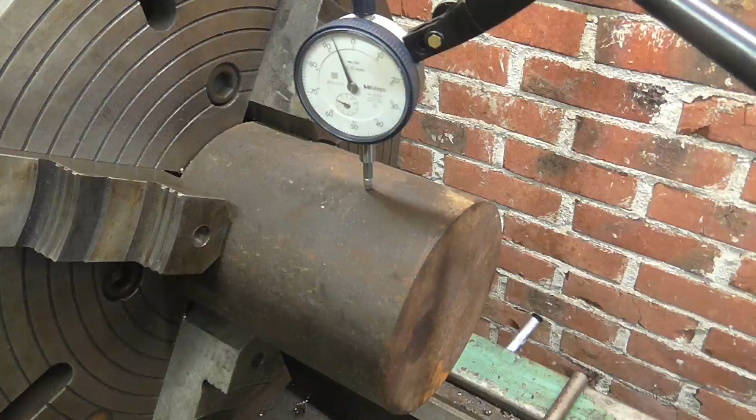Okay, with this part you're gonna see some heavier turning. This will be the part that connects the pipe to the shaft in the upside of the pole, or whatever it's called. Again, this is a piece of mystery steel.

I have no idea what the grade is. The diameter is 120 millimeters. I'm trying to dial it in. Let's see if we get any luck.

Getting close on this side. A little over 3, maybe a little over 3. And this side is, oh, there's a really big dent in here. So this is a little over 3. This is a little under 3, so tighten the other side just a bit. Oh, it's almost loose still.

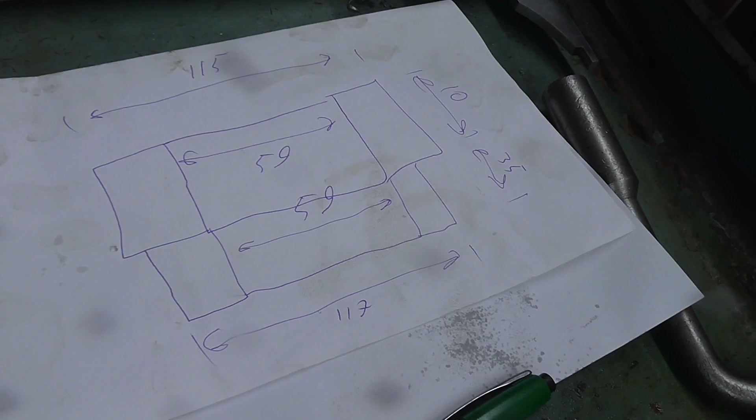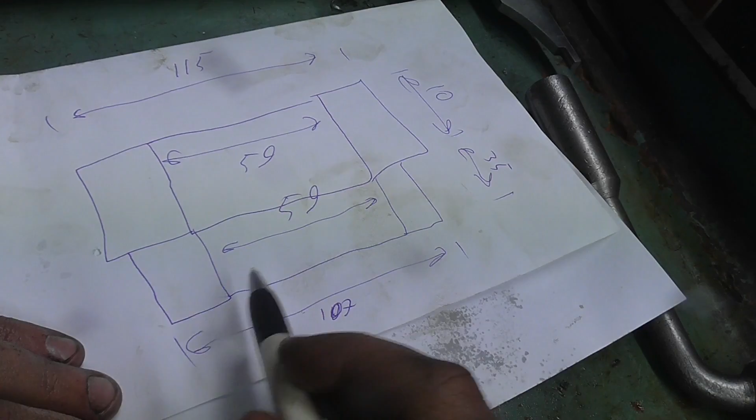Okay, another one of my rough drawings. So this is what the piece is gonna look like. It's gonna sink into the pipe. This diameter, oops, this should be 107. This diameter here will slip into the pipe, and here will be weld. Actually, I have to bevel these

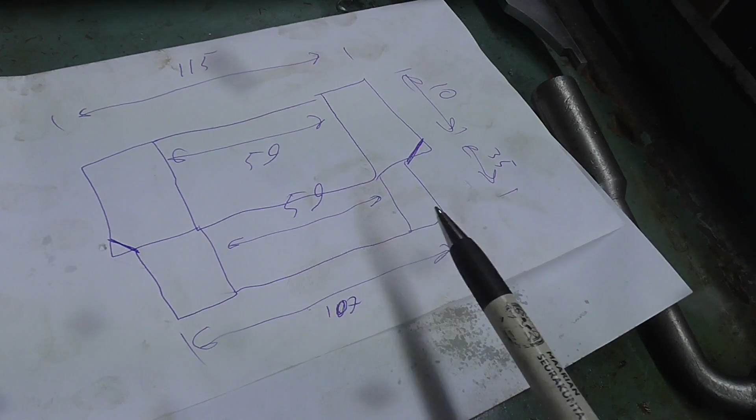for the welding, and it's gonna have a 59 millimeter hole in it, so that I can slide the shaft in, and I can weld it here and here. Also this is gonna have a press fit or a shrink fit. Not sure if I'm gonna heat it or press it. And the outside diameter is the same as the pipe's diameter, which is 115.

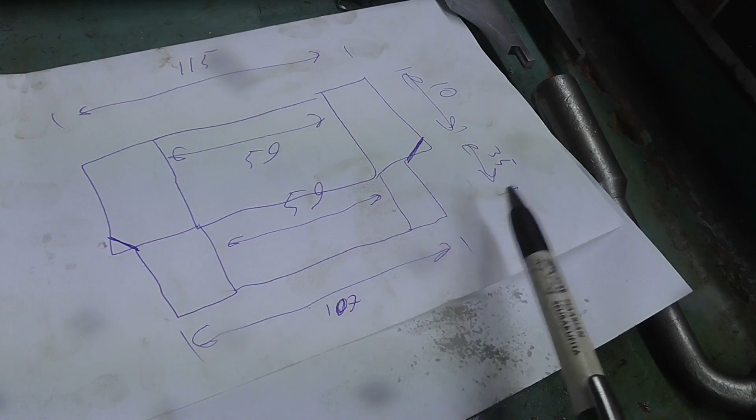And this means that you're not gonna see some very heavy turning. There's only 2.5 per side to remove here, and a little bit more here, but it's not very much. But there will be a time when this tool is gonna see some heavier work.

Let's get set up. I'm using the same speeds and feeds as last time. In other words, the speed is 360 and feed will be 0.28.

Okay. Let me get my glasses. Okay, first straightening the face, and at the same time I'm getting to recheck the tool height, which should be correct, but I haven't checked it.

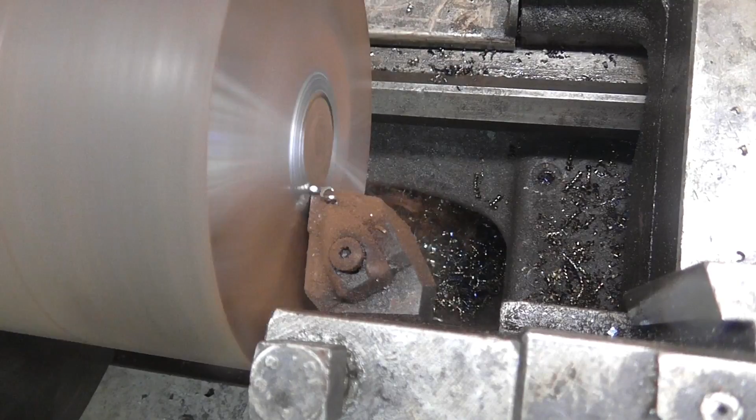Millimeters. Perfect center height.

Okay, the face is now cleaned with a great surface finish. And now it's time for the outside. Always have to double the feed when face cutting. I mean using the cross slide to feed.

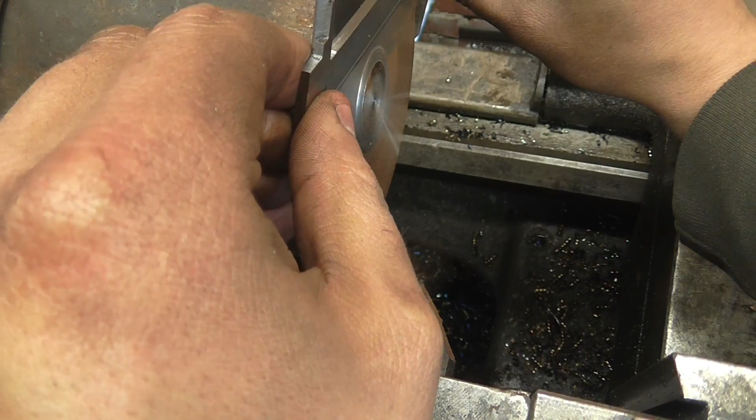Just trying to get a diameter reading first to see where we are at. 120 and a little bit over.

Yes, so 5 millimeters to go. Let's take one, two, three. Let's zero first. Let's try 4.5 of diameter. Actually, let's go with 5.

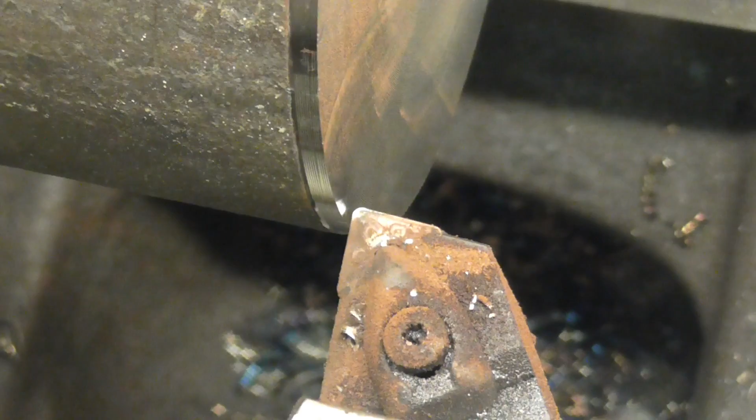We should still have some material for finishing. This again is one of them, not critical dimensions. It's just supposed to be the same diameter as the pipe's OD.

Hope you got a good view. Let's go! Oh yeah, that's beautiful.

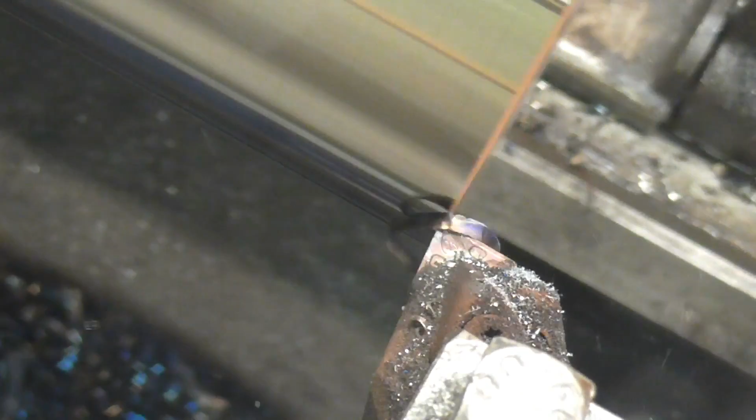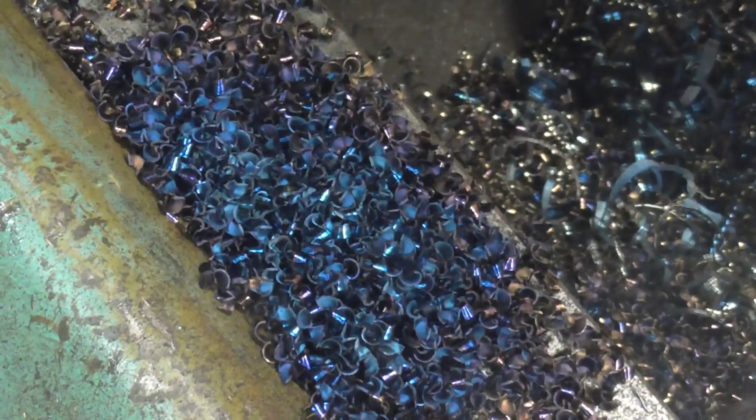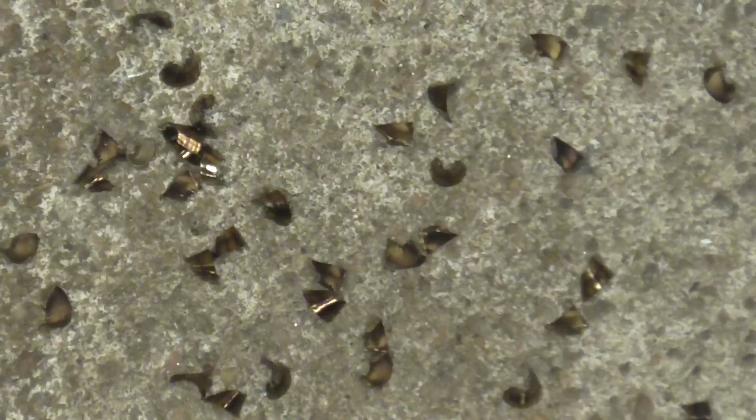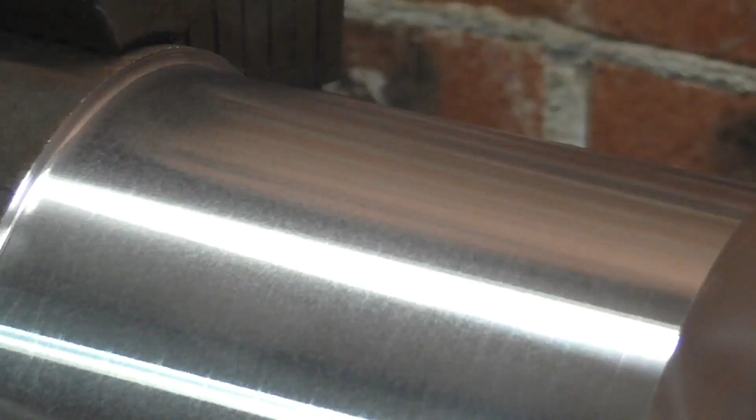This is by far the cleanest cut I've had for a long time. Look at these chips. Beautiful. Still smoking, some on the floor also. And the finish is awesome. Really happy with this. Beautiful finish and beautiful chips.

And it feels like it's good for much heavier cuts. Okay.

Now let's turn the part that goes inside the pipe. So we have, I think it's 4 millimeters per side, because the wall thickness of the pipe is 4 millimeters. I thought it was 5, but it's only 4.

This might be a good angle. So we are going 25 millimeters, 35 millimeters long.

8 millimeters of diameter to go. Let's dial that in.

I think I'm gonna try to take it in one pass. So it will be 4 millimeters per side. That's a pretty nice cut.

Okay, this is one heavy cut for you. Let's see how it goes. I'm gonna recheck the tightness of the jaws first. Feels very good. Okay, let's go.

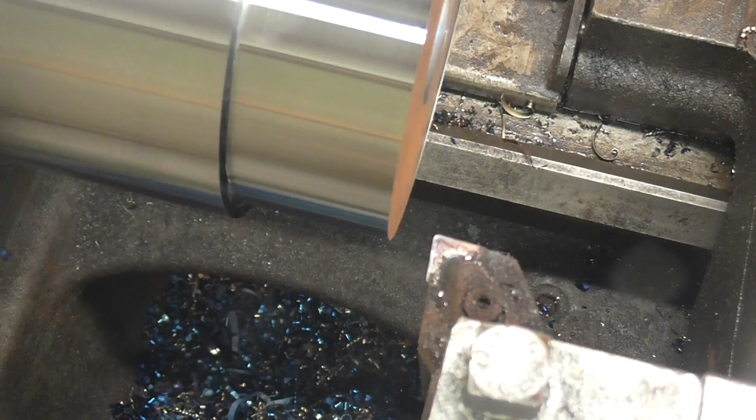And this is gonna put some strain on the lathe. Okay, I was liking it so much that I forgot how far we were supposed to go. So I think we went too far. Let's check.

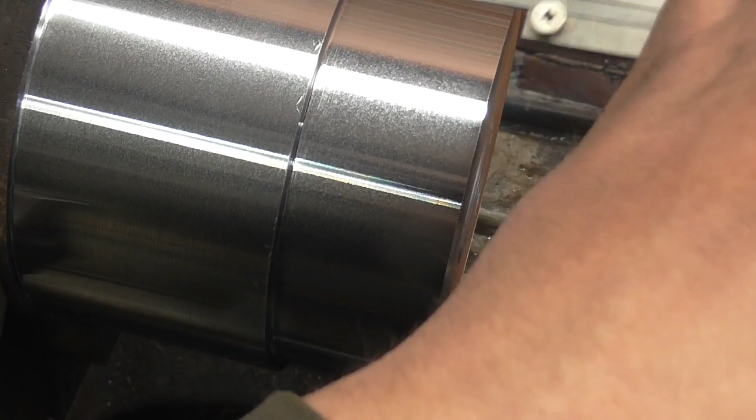4 millimeters too long, but that doesn't really matter. It's only that maybe I'll have to move the piece in the chuck to get access to some more material. But that was a really nice cut. Finish is also great, and the chips are magnificent. Beautiful chips.

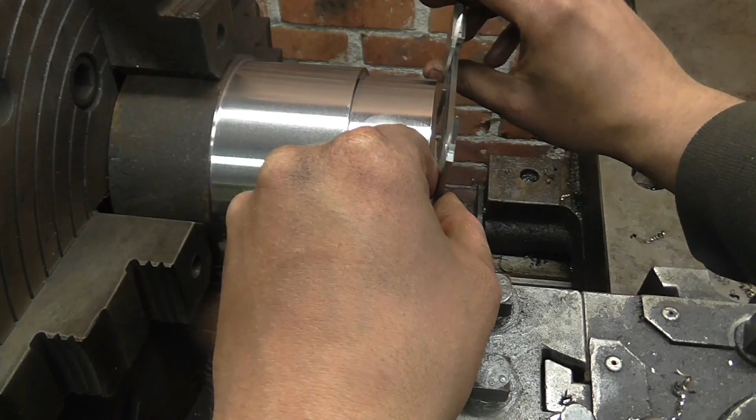Okay. And let's measure, 107.2. So I think we still have to take a little bit. Let's take half a millimeter, so it should slide in pretty well.

That was too light of a cut for the chip breaker to work. I should have used the finishing insert.

Now chamfering the edges using this square insert tool. A big chamfer, and another one here for welding.

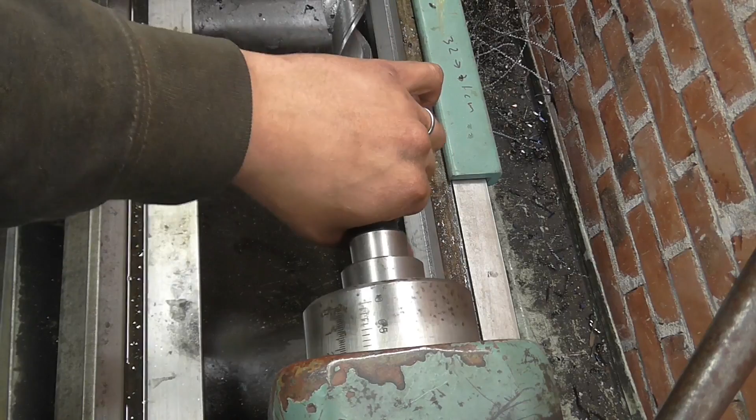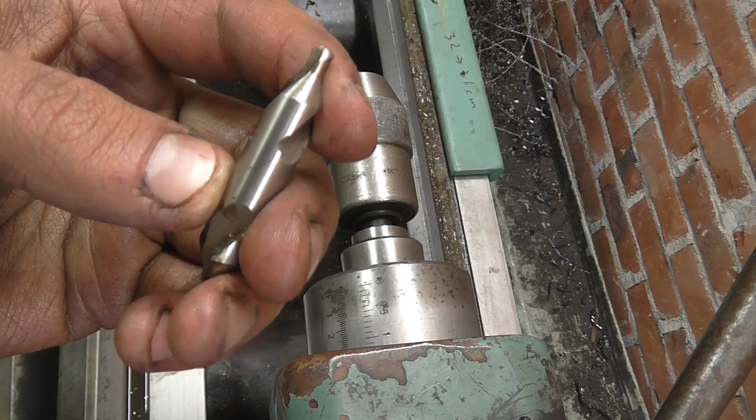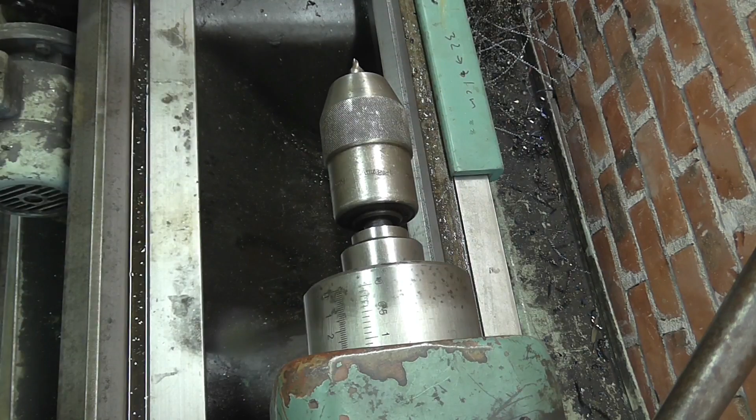Now we will start drilling. Removing the dead center and installing the drill chuck, using a center drill with, I think it's 3.5 or 4 millimeter by 10 millimeter. Let me wipe the waste. Okay, going for a center hole.

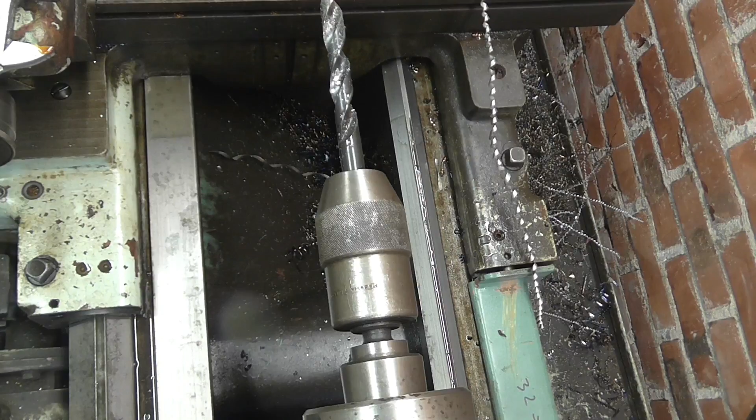Next is a 14mm twist drill. Okay, now we have a 14mm hole.

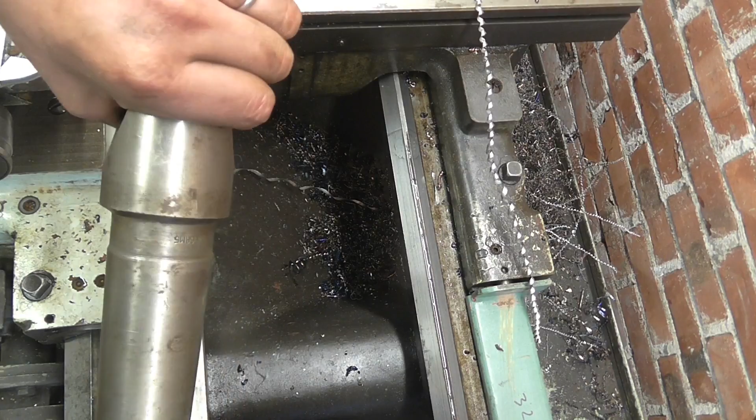We're gonna skip a few sizes and jump right to the big boys drills. This is a 55mm drill, so it's a little over 2 inches. It's got a new grind on it, but I don't think it was done by me. I have no idea if it's sharp or not, but we will soon see. This is a pretty fine sized drill.

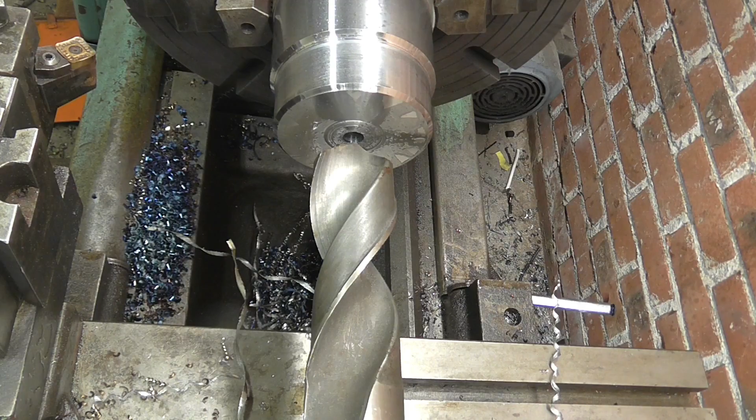And I have 40 RPM. Let's see how this bad boy does. Some oiling. Phone is ringing. Okay, ready to go.

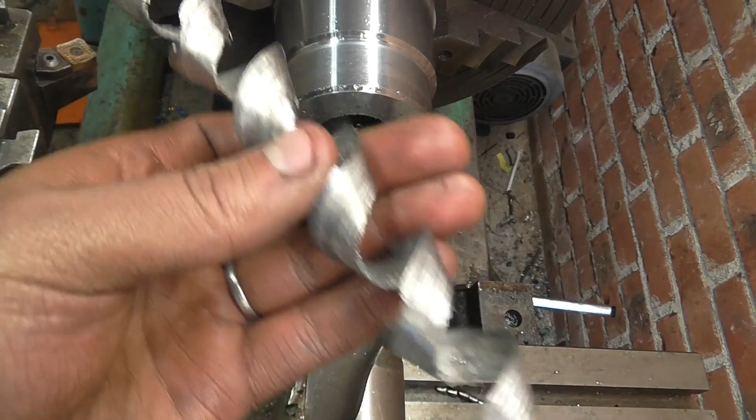It's not perfectly sharp as you can see. One side is making good chips, but the other one is not. Okay, I ran out of pilot hole. This is a pretty nice chip, I think. Must weigh like 100 grams or more.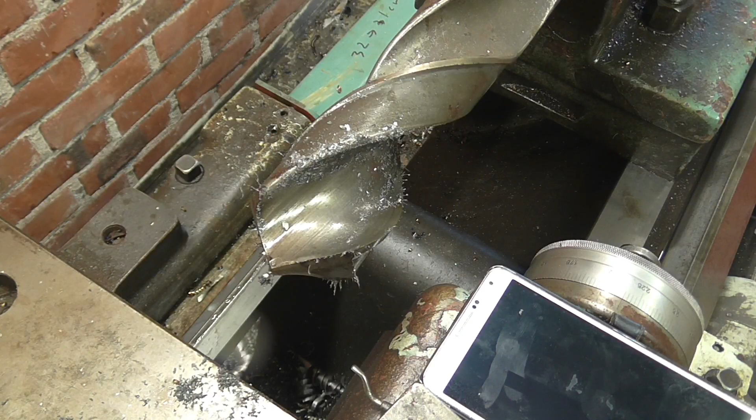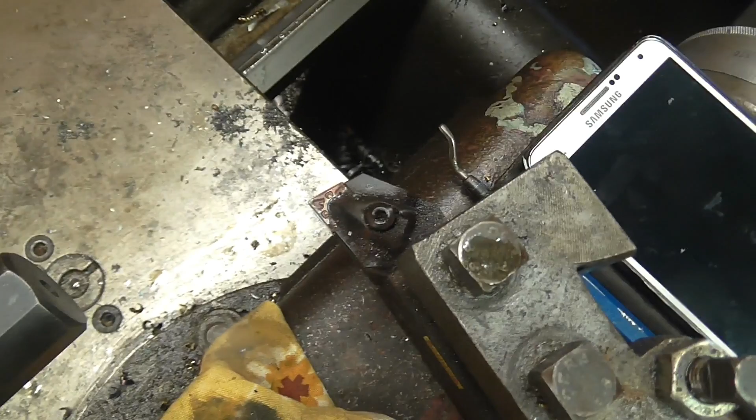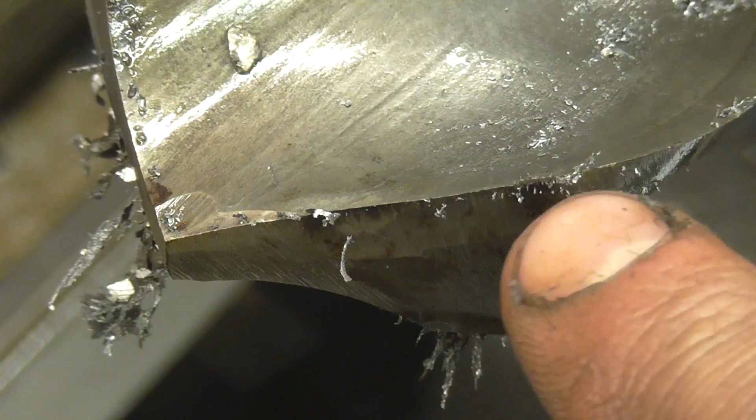I never understood why you have to drill a hole in many pilot sizes. To me it's like using this lathe insert right here by taking only half a millimeter cuts, many half millimeter cuts. It only wears out the edge when you have the whole edge to use. The same with drills. If you have many pilot sizes, you're only using like a few millimeters or a few thousandths on the edge right here, and none of the rest. So if you have a powerful enough machine and rigid conditions, why not just go from the pilot hole to the size that you like? Of course, taking into account that the web size here is not larger than the pilot hole.

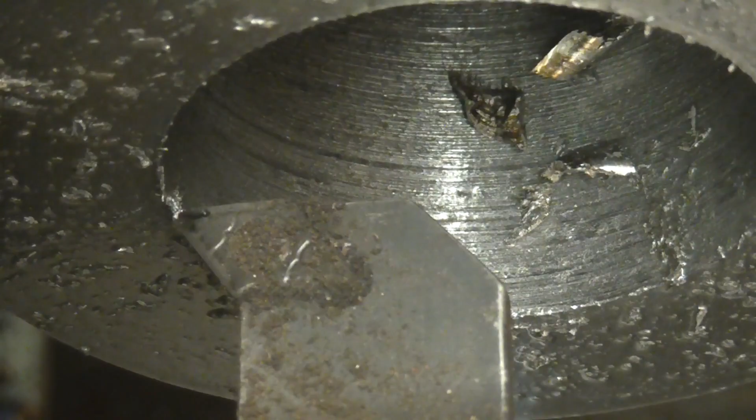Turning the inside 4 millimeters larger.

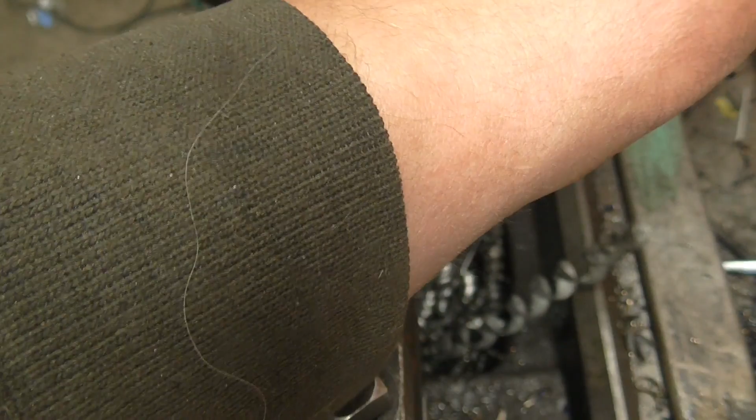Not ringing this time, which is good. So 59 is the aim, and now we are at 57. Let's add in 1.5 millimeters, so we should have half a millimeter to take off for the finishing pass.

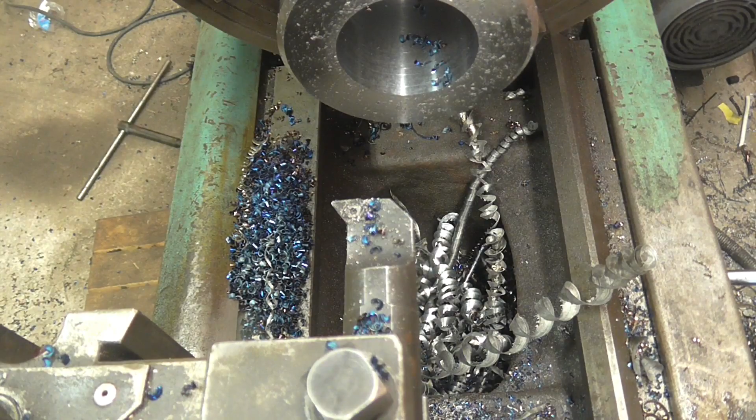Pretty good this time. Half a millimeter to go. Again, this is not critical. What is critical is that I make the shaft to fit this bore, and I'm gonna use some micrometers and bore gauges and everything to make the fit good.

Exactly 59, at least by the caliper. Now I'm gonna part it off.

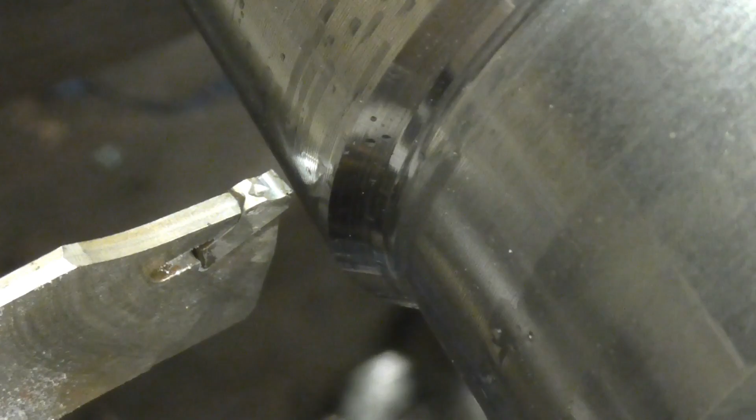Okay, the parting distance is so long that I'm gonna have to use this tool with an adjustable blade. It's just that the insert's got a special grind by me, because this is the one and only insert that I have for these Seco tools. I have a ton of these blades and other Seco parting tool equipment, but I don't have any inserts, so that's something I'm gonna have to get soon. Another possibility is to get some Sandvik tooling for parting also, but since I already have these, I think it would be a good idea to use them.

But the first thing I'm gonna do is do some edge rounding into the bore, in this way.

I've also ground the insert at an angle so that it doesn't leave any burrs on the piece that's being cut off, but it also makes the tool want to bend. So let's see how this goes. I hope the low feed helps. Also, I'm gonna use some oil. Let's go.